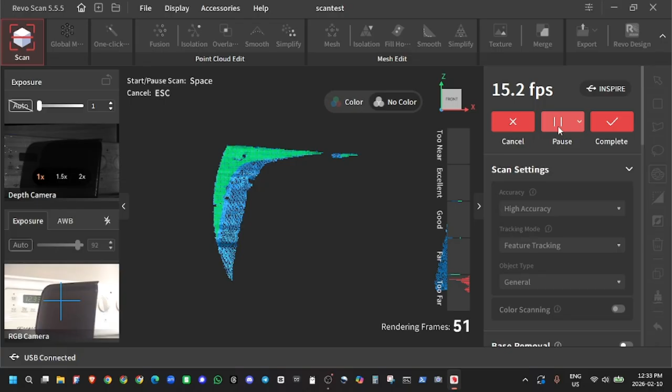What's going on here is that the black plastic is absorbing all of the infrared light. This scanner sends out infrared light very specifically and looks for the reflection back. That's how it creates the point cloud data to create the 3D model eventually. But without that light coming back, it can't detect anything and it can't build any point cloud, and we can't get a model. So this is not going to work. This automated scanning process is doing exactly what it's designed to do, but it's not able to detect what it isn't receiving. So here on the screen recording during the scan, you can see that there's no data.

You can see on the left side that the scanner was properly aligned because the depth camera and the color camera are both recording nice clear images. There's just not enough light coming back. That's something we're going to have to fix. And something that's a little surprising is that I haven't really scanned anything black before. I know just from learning that black objects are notoriously difficult, and I've tended to avoid scanning them, and it just hasn't come up that I've had to scan one before, but now I do have to scan one.

And fortunately, past me was thoughtful enough to put together a little bit of a trick spray that we use in the industry. It's a bottle of isopropyl alcohol with some powderized titanium oxide in it. Titanium oxide is really bright white, and it's going to reflect a ton of infrared back at us. So what we're going to do here is shake up the bottle and spray it all over the part. And we don't need a thick coat, we just need a thin coat. And as long as it's even, that's going to be getting us what we need.

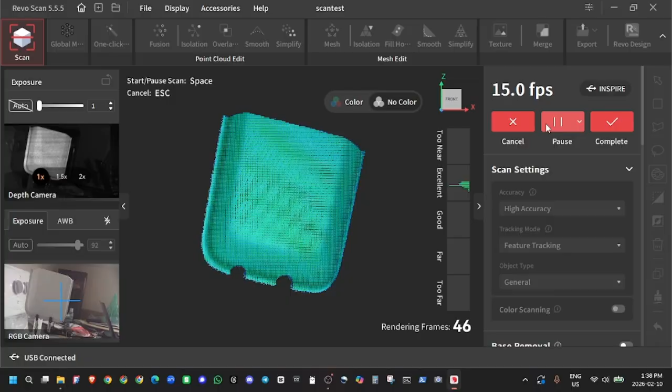So after I give it some time to dry, I set it back up on the scanning rig and I start to scan. And here we're getting a great mesh. It's going from blue, which means points detected, to green, which means the automated process is working properly and we're getting usable data. So what I do from here is a few more scans to make sure I have an abundance of data, abundance of good scans.

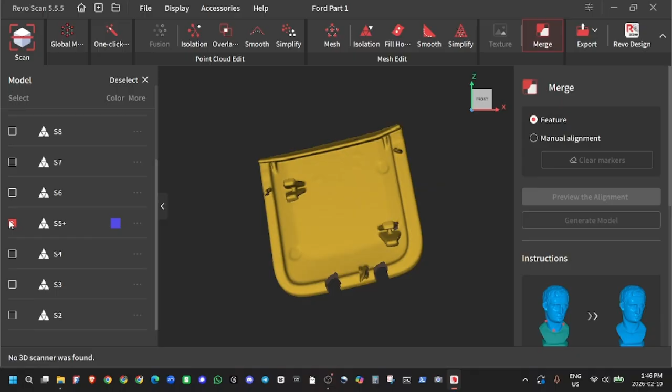And then I adjusted the orientation of the object 90 degrees. So that way, the little clips that are on the object holding it up, they're in different spots for different scans, so the part that they were covering up will get scanned in the next set of scans. So what I did after that is I took the best scan from each orientation and I merged them together, and they overlap each other and they compensate for each other's gaps. And now there's enough data that I think we can go to a 3D mesh and export.

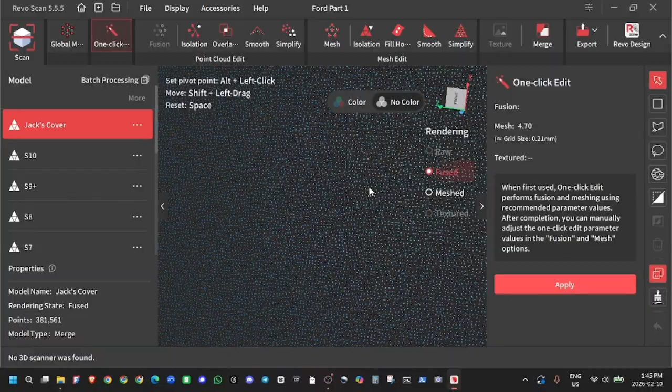And if I zoom in really closely here, you can see that although this looks solid on the screen, to the computer, to the software, this is a whole bunch of floating points in space that have very specific position and distance from each other.

So that's kind of how the scanner gets this data from the real world: it's taking a lot of 3D samples of points in space and identifying whether there is the edge of an object there or not. And when you take a whole lot of those really close together, like these are, the settings can vary, but here on this scan, I'm using it at 0.2 millimeters apart. So those little dots are 0.2 millimeters apart. Every millimeter, there's 5. So it's quite high detail.

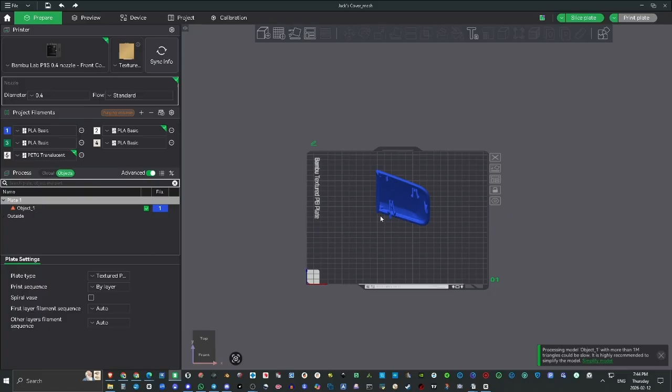Yeah, I'm satisfied with this scan. It's worked out better than I expected. Here, we've got all the major geometry, so I'm ready to go to the next step. So here, I've got Bambu Studio open, which is the slicing software that I like to use for most situations. For me, Bambu Studio is going to work fantastically for this project.

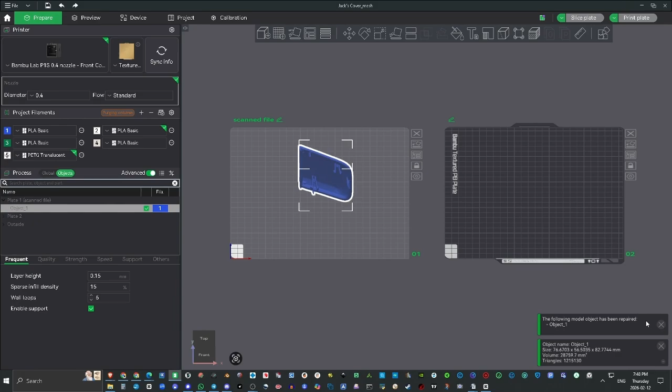So I've already imported the file into the slicer, but remember that this is a one-to-one scan of that part that my friend handed me. So this part needs to be mirrored so that it matches the opposite side of the vehicle, because its features are all in alignment for the left side mirror. We need to create a copy for his right side mirror.

So what I'm going to do is I'm going to mirror this object along the x-axis, which means all the features are going to swap sides. And it looks like it's done its job properly. This automated little tool is super useful, super powerful, and it's extremely reliable.

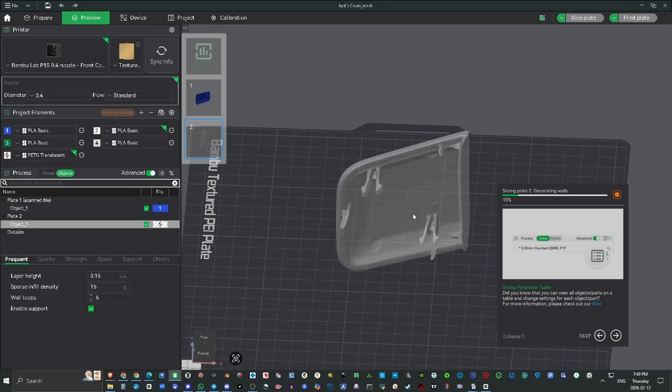From here, my next thought is that we need to add supports and then slice, which means to prep for printing. And what I'm looking for here is I'm making sure that the clips, the prongs, have proper orientation through the printing process, because the 3D printer lays down stack after stack of very, very flat layers, and it builds up the object out of that.

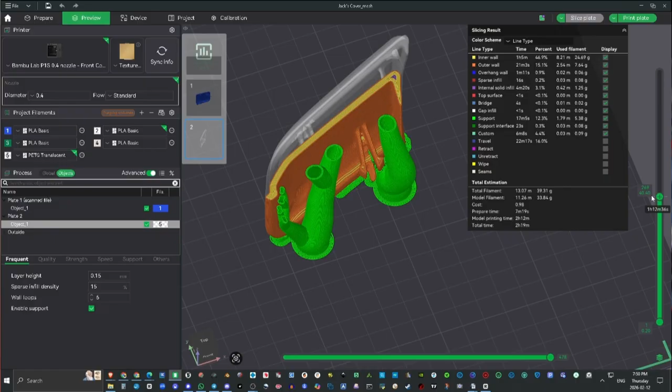If I put the object face down on the print bed and the prongs are facing up, they're liable to snap off relatively easily. I want them printing horizontally so that they're made up of very long lines and it can share strength through the rest of the part. That way, they're much less likely to snap off during usage, especially considering this is going to be on the vehicle. Now we're ready to print, and it's printing time.

Oh, hey, for anybody eagle-eyed, you may have seen a mistake that I'm about to make. And bonus points to you if you see it.

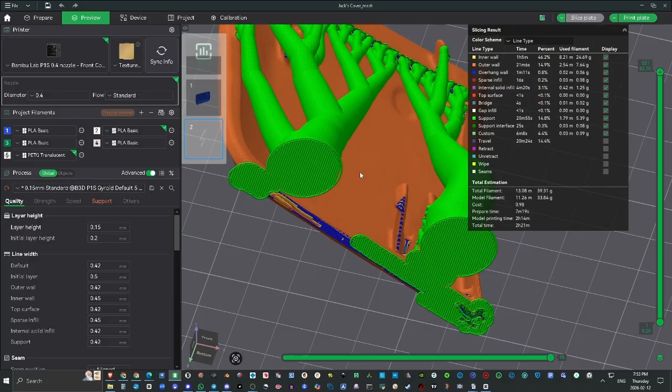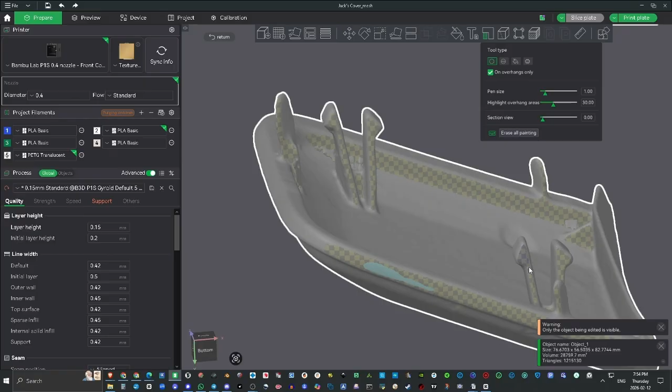So I'm back in the slicer, and I'm going to go into the manual support options to force the software to put support exactly where I know it needs to go. So here I'm working on the undersides of the prongs that were skipped. And this bottom prong did get support, but I want to extra make sure that it does on this second print also. So I'm adding supports there just to make sure.

The reason I think that this prong didn't get support automatically is because of the threshold angle. When the underside of a slope has sufficient angle, supports won't be printed. And I think this prong may have just had enough of an incline that it didn't get support, even though I knew and I wanted it to have support while printing. So that angle is adjustable.

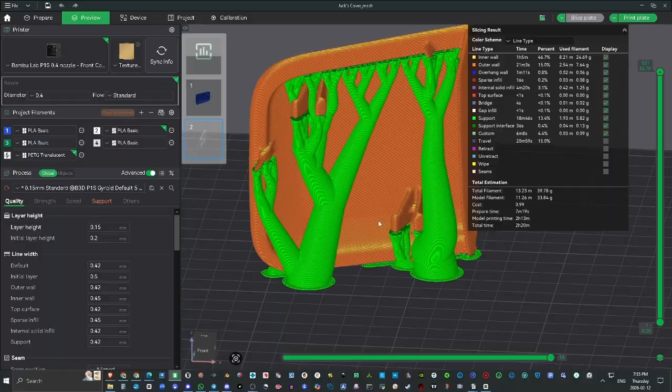Had I noticed that it wasn't properly supported, I could have adjusted that angle and the automatic supports would have picked it up. But there's more than one way to solve a problem most of the time. This one for me is exactly what I need. So I'm just going to paint it, tell it exactly where to put the stuff, and we're going to see how it works out. Time to print. Wow, so fast. If only it was that fast in real life.

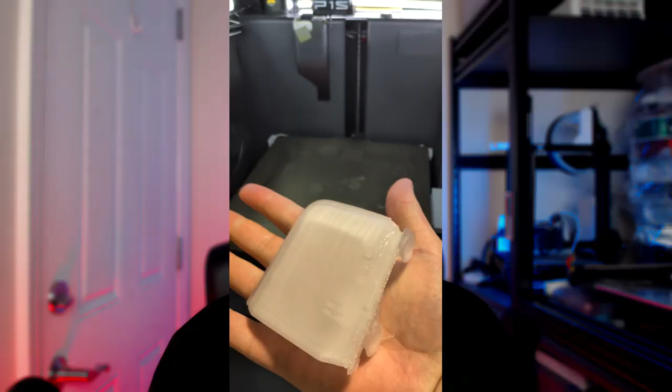Let's take a look, and it's already looking much nicer. The clips are fully formed. Yeah, there's nothing wrong here. This is pretty much all good. Yeah, we're good to go. I'm going to get these supports off.

As I'm getting the supports off here, I'm noticing there was another area that didn't get properly supported. It may have been from material shrinkage. It may have been from the slicer not putting supports far enough up. It's not perfect. I'd give it, say, like a 98 out of 100 overall for this part.

This is a cosmetic problem that I'll be able to file away, just like with a woodworking file. It's not a critical failure. It's more of an aesthetic cosmetic thing for this area of the model to have this kind of issue. On another print, it may be a failure, but on this print, it's an acceptable imperfection.

So here we can see that the automated printing process has produced a functional part, but it's not perfectly optimized. When it comes to these prints, the final print quality and slicer setting choices are inseparable. We use profiles that tend to work most of the time, but every so often, even with a skilled operator

going into it, we overlook something, or this part has just a little bit of a detail that's just in the right spot to trip up the automation in a way that we don't expect, but when we see it, we recognize what's happening and we know how to make the adjustments.

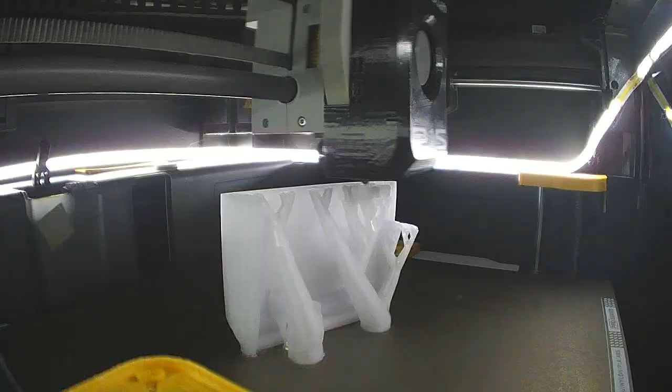We've got the two printed parts along with the original. And aside from the writing that's on the inside of the injection molded panel, we've got pretty much an exact replica of the part and a mirrored replica of the part.

Wow, perfect fit. And this project was a success because we have very powerful automated tools that do things people can't. I could not sit there and just by eye create a point cloud. I need an automated system to do that for me. But at the same time, that automated system needs me to aim it properly and set things up for it properly. Those automated supports do a ton of work.

I would hate to go in there by hand and add in each support each time in each part for each print. That's just not realistic. But at the same time, they need me to double check them more thoroughly, especially for critical areas. And when it comes to choosing to override these automated systems or modify what they're doing, corrections need to be made by someone who understands the workflow, the necessary details the finished part has to have, and the wiggle room within the process. Because if we make changes too far, it'll disturb something somewhere else.